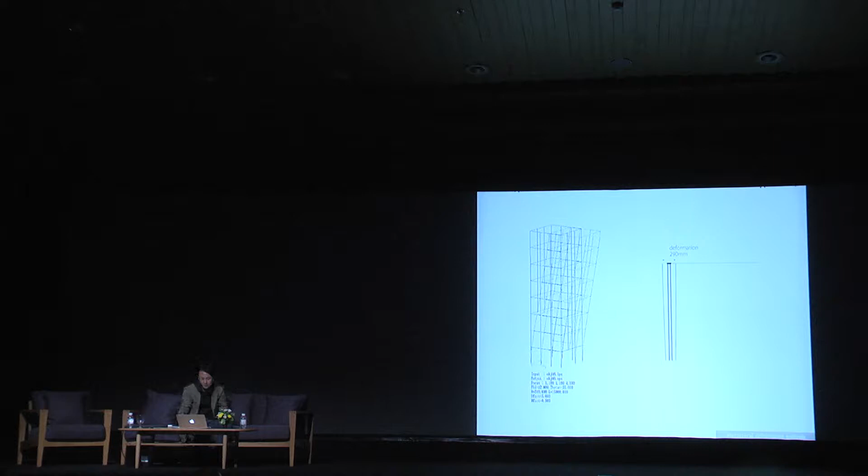They all have bracings in all grids, and they have loose holes. So usually they're movable, but when the wind gets strong, this locks at some point, and it avoids collapsing. The structure is sandwiched with a rubber sponge-like material to deform with the structure. It acts like a sail on a boat to take the load to the steel frame, and also absorbs the small sound and faint vibration during the deformation.

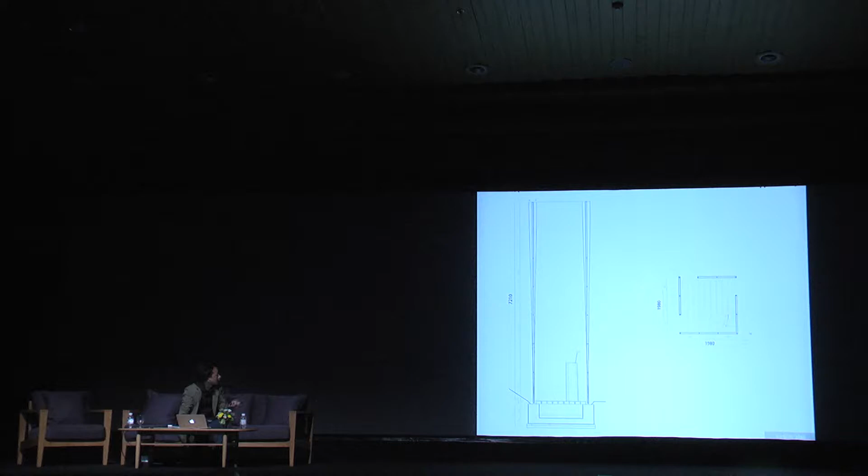So this is from the inside. We put a tall chair inside to see the deformation more, because as you go up, you see more deformation. So we made the chair a little bit long. You can see that the size is very small, 2 meters by 2 meters. So it was a structure to frame the whole scenery for us, with the windmills and the scenery.

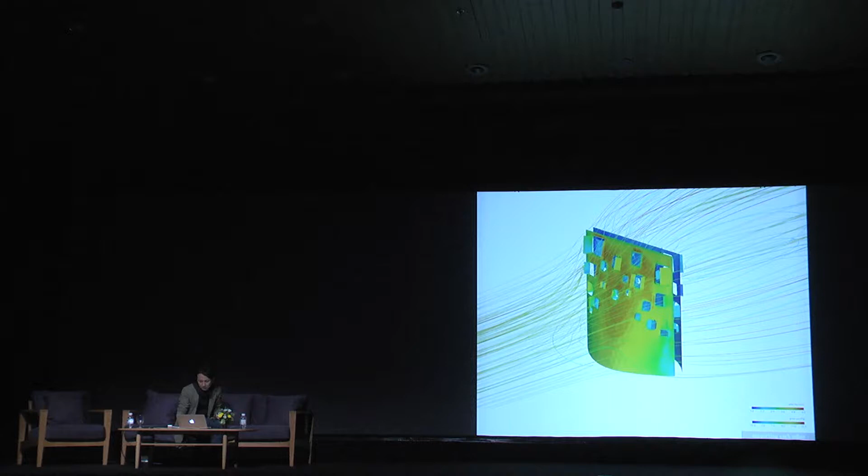And trees and plants grow, and maybe butterflies stop over. We imagined something like that in between these two walls. Sky, horizon, grass, small forest. We hope those things will be grown in between these spaces and mixed together with the surrounding environment.

And the shape of the wall is, the base is a parabolic curve, and as you go to the top, it gets straighter. So from one side, they can gently take the wind to the side. But on the other hand, the wall takes in the wind load, so it falls down. So these two walls are actually helping each other and supporting each other to exist in this place.

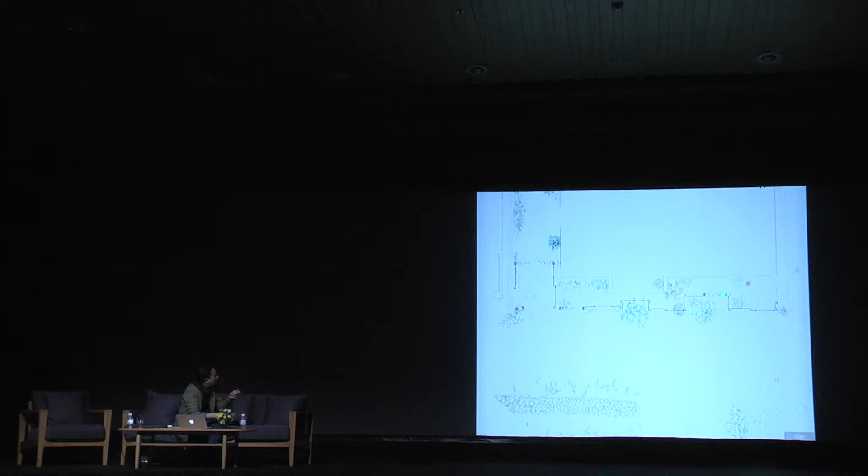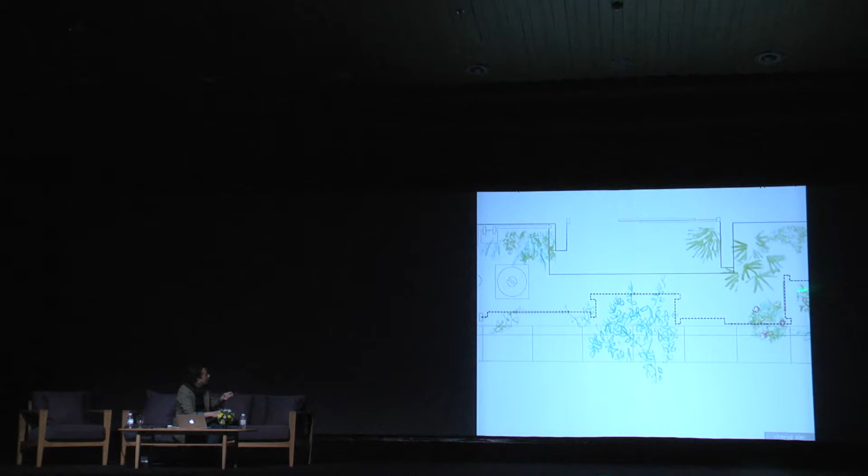But it's still weak. So we bent it at the corner to make a pillar-like structure, and an intermediate pillar-like structure to make the wall stronger. So this is what we made. And we put a stainless mesh curtain for the gates. And there's another gate here, actually, a bigger one.

And we opened some windows so the wind can go through. Also, this material can let the air flow through. But we wanted the wind to come in also, so we opened some openings.

So this boundary can be reread according to the situation of the surroundings and what comes up together with the sceneries, like continuous with the street or continuous with the living room, and it can be from the other side. The street can be wider. So it's something that's very flexible in a way, and it works like a lace curtain. So in the daytime, even if you open up the window fully, no one can see inside clearly.

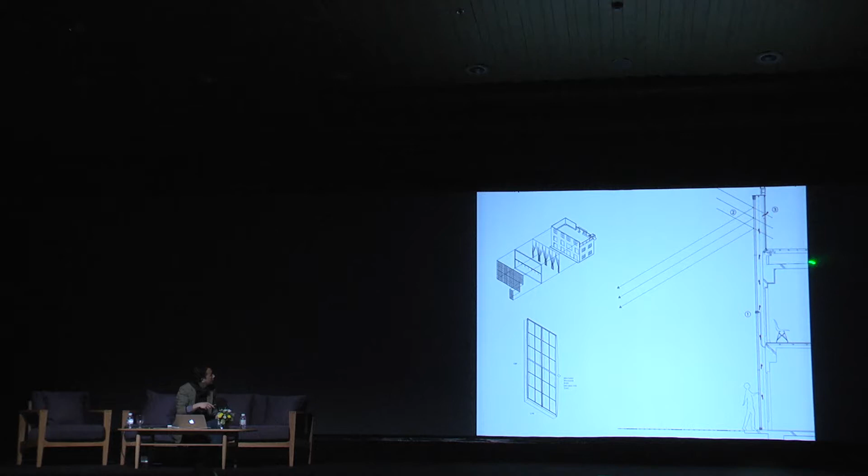So we needed the door to be light, and we calculated this balance, and we also calculated the deformation of this door during typhoon season. So we ended up with this door being able to deform 10 centimeters towards this side. You can bend like this for 10 centimeters without the glass or anything, or the doors getting off the rail, in the very windy situation.

So it's like a very, not very hard, maybe window. It's kind of like a membrane kind of structure window.

And this is the reflection we have. This garden is quite artificial because the shadow, we have it to the opposite way. This side is the south, the sun is here, so it's a very artificial garden.

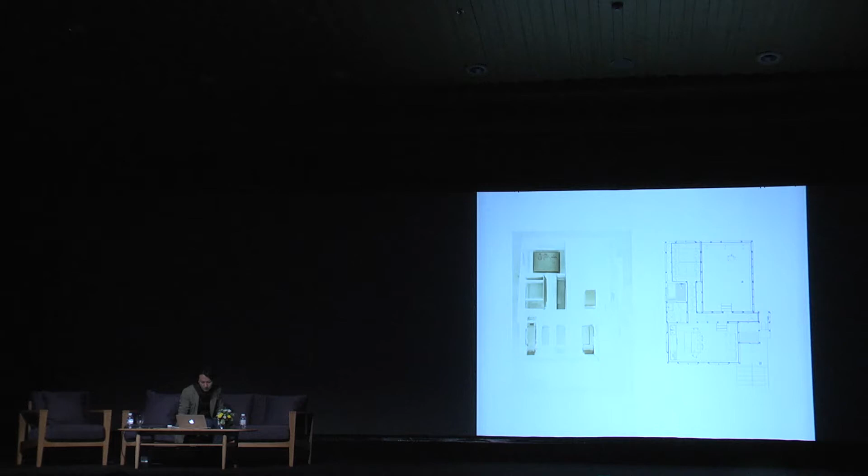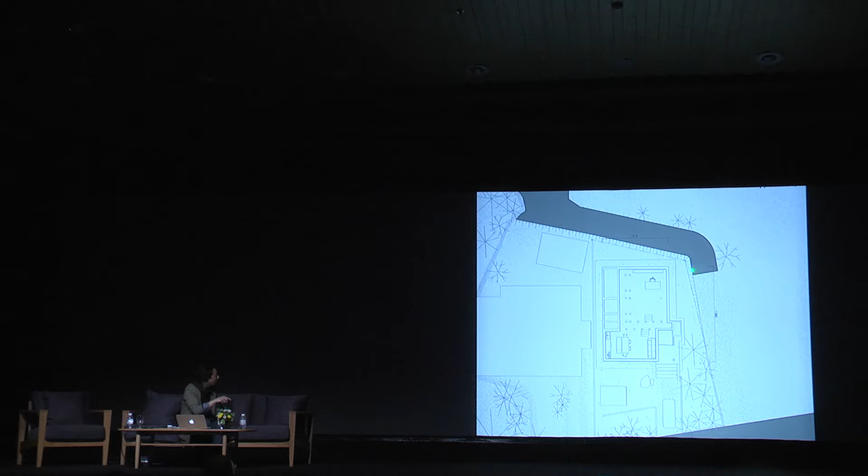And it was reasonable. We tried many plans, but he was trying to avoid taking off pillars and things. So it was very polite to the structure, and the variations we made were actually not polite. So we thought we'd give this plan to the renewed house, but instead we looked into the foundation, which was very dirty. If the upper house is clean, but you have a dirty foundation, I thought it was really a pity. So we thought we should refresh this, and also anti-earthquake. We had to strengthen the foundation, so we focused on the foundation instead of the upper house, and we added this concrete slab and lowered the initial height.

The owner actually knows what he wants, and we can be someone who can advise them, but it's sometimes hard to propose an idea, because I think that's not what they're looking for. Actually they're looking for something else. For this one, they were looking for an idea to live with the surroundings and have a lighter environment instead of the previous dark house. So we focused there.

So we just added this concrete slab bowl, insulated it, and put heating pipes inside. In winter it becomes a warm bowl, and in summer it keeps the cool air inside. Since the previous floor was changed lower down to almost ground level, the sunlight reaches deeper, and the scenery which looked horizontal before now looks up to the mountains, so you feel more sky from inside the house, closer to having a situation like outside.

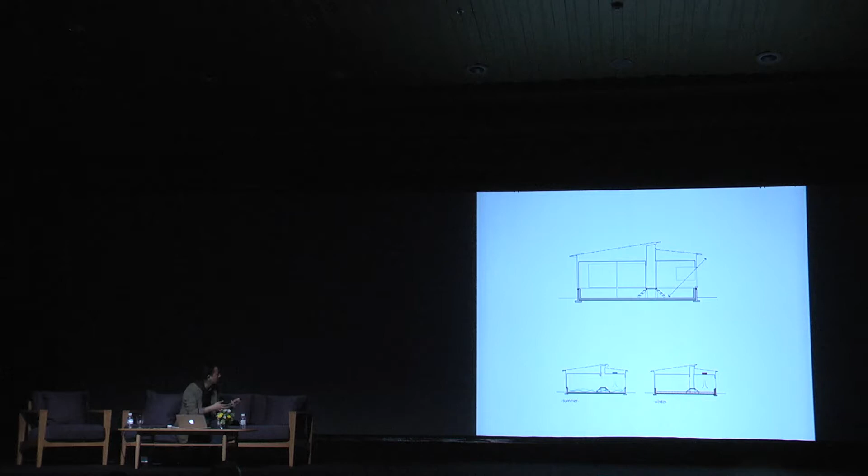And we separated the foundation and the housing with this long ringed baseboard, all around in one ring, to make the housing territory, which is put on top of the foundation.

And also reflection from the other side comes from down the corridor to lighten up the whole space. This is the existing entrance gate, but we left it as an entrance so you feel you're going inside the house.

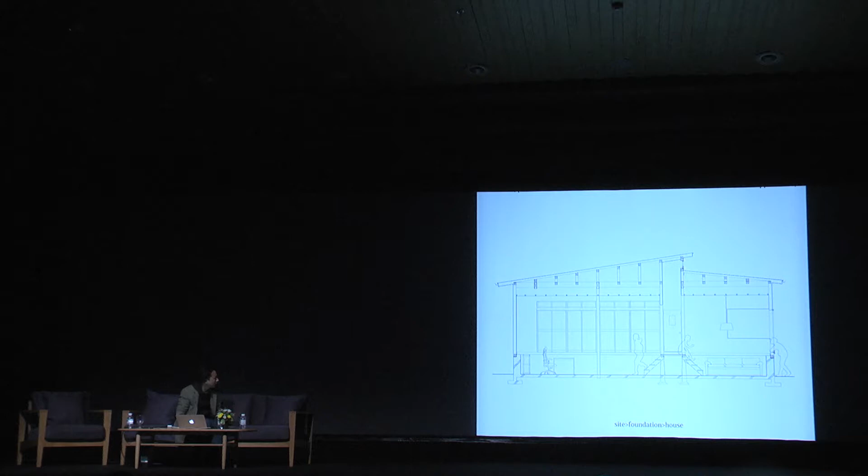These kind of little small elements are usually overlooked in making totality in architecture. But I think making these small elements, and designing very carefully these in-between relations, can actually cross borders even while making a very explicit boundary—not making transparent housing, which produces another problem. So we're very into those kind of overlooked elements.

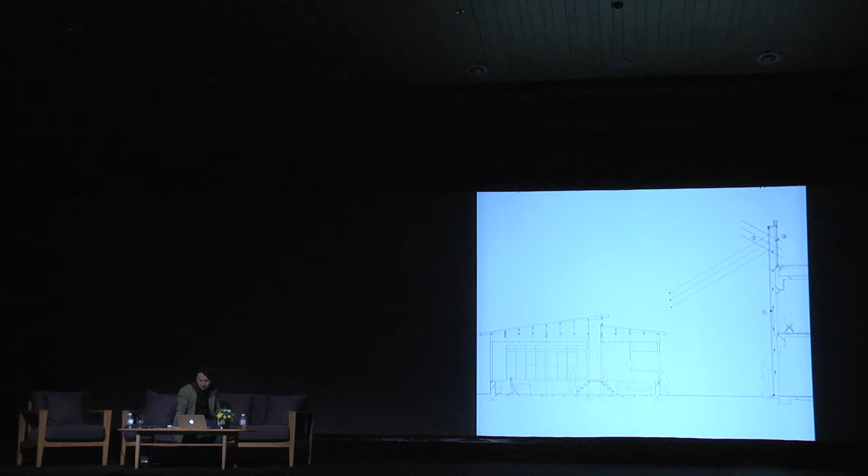And this one is called initiative roof—I don't know why we called it that. I think I wanted to propose something that was like there before the house. This is also a renovation project, and the main house was built 45 years ago. They wanted another room for storage, so they added a small room later on, maybe 10 years later, and it was to renovate this house. It's actually relatively big as a Japanese Tokyo house.

And we went to the site and saw the house, and it was very... it's from 45 years ago, the land is big, so the housing was also big. So it was actually big enough, and numbers were enough.

So we even actually had an extra room outside, but the client wanted something else. The client wanted to add some kind of green room or glass room to the garden, and to gather this separated land into one again. So I think that's what they imagined with this greenhouse.

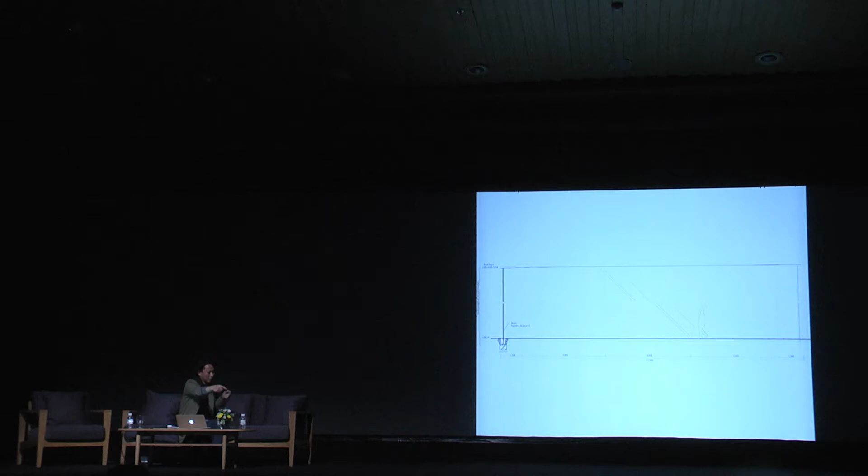So this is the scale, and the staircase brace also works as collapsing to this way, because it's a very umbrella shaped structure that doesn't define a place like surrounding with 4 pillars. It's just 1 pillar in the center that creates this side and like this side. And also this is just bent with its own load.

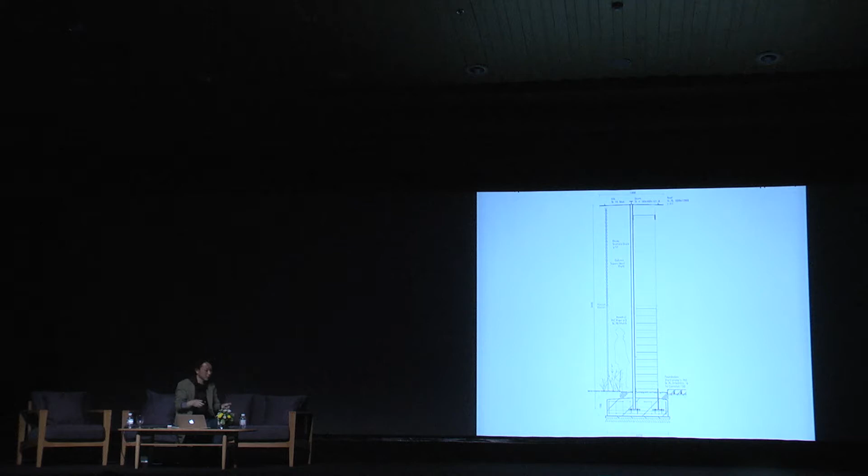This is a 4.5 millimeter steel plate, and it's like a very light, slightly bolted shape, also pulled at the end with this chain. So it's a very flexible, very complicated shape, this roof.

And it kind of grabs all the surroundings so it makes this garden and surroundings an element as an interior, like for the house, for the living. So you can see it's slightly sloped in this way, and also it's sloped this way.

In the previous projects, we were defining the scale in a more aggressive way. But this time, we tried to scale this thing not to avoid the existing elements. So these existing overhangs have a function that blocks sunlight in the summer, but gives sunlight deep into the house in the wintertime.

And so we didn't want to avoid that. We could maybe extend this overhang, but that would make the wintertime very shadowy. So that's why we separated the structure outside and made it higher, so that it actually creates extra shadow at the summertime, so that the inside house and the garden have connected shadow.

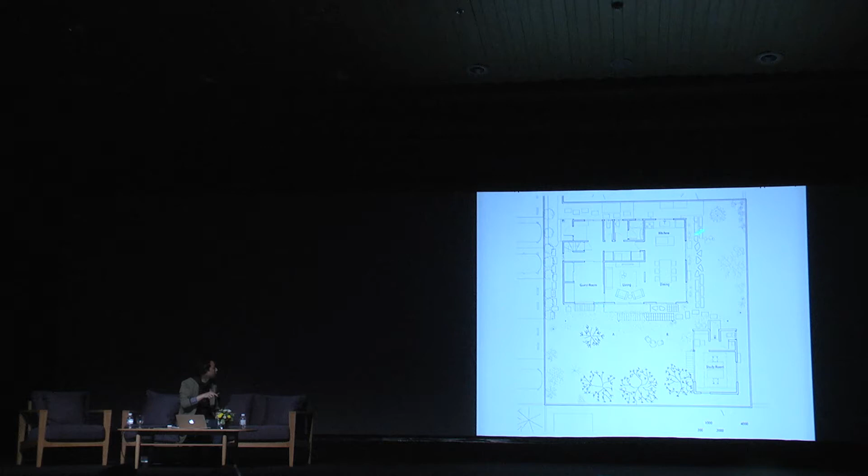And this client, they don't even know what architects do. I don't know why they came to our office, but the site is very close. I think that's the only reason. And the request was to make the living room big, and also it's a housewife, so she wants very efficient water spaces so that she can work very efficiently during daytime.

And also it's very dense. The housings are very densely built around. So she wanted privacy. She doesn't even want to make any window transparent. So that's what normal people say, and I can understand that really. So I wanted to propose something that can create that request more architecturally.

So we made this place. We proposed to use these utility spaces to be the depth of the living rooms and bedrooms, because they don't want to make many openings to this side. They just wanted slight light from the south side, just lights.

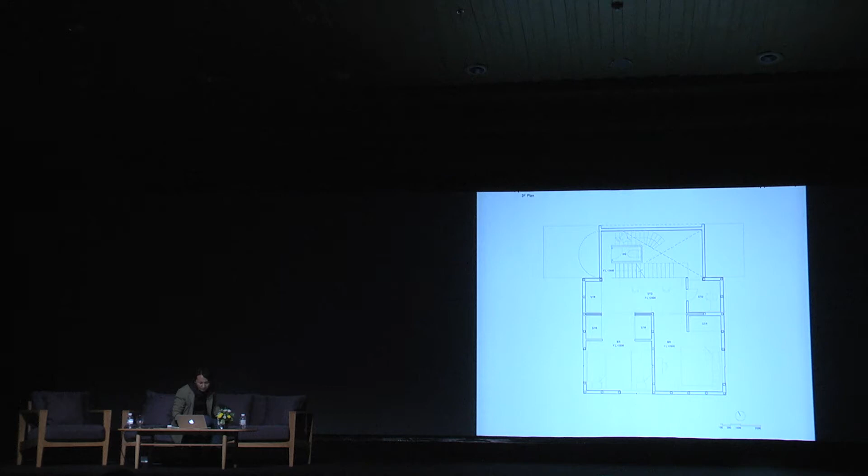So we tried to make this place, which is usually like a black box in the house, but it's actually 1/3 of the space in the house. So we thought we should open that in some way and use that as a scene for the living room, to make it deeper and maximize the feeling of the living room relative to the site size. And that's why we separated them, so this is the utility space, and this is the room.

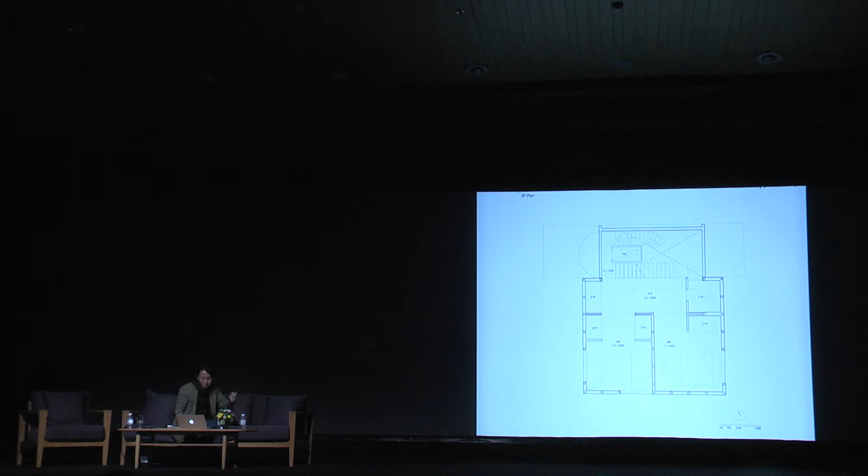And also the budget is like a normal house, so we had to deal with the budget also. So we decided to make the rooms relatively cheap, using industrial material, very much like a housing maker house, and we focused and put money into the utility spaces so that this room can have a good scene.

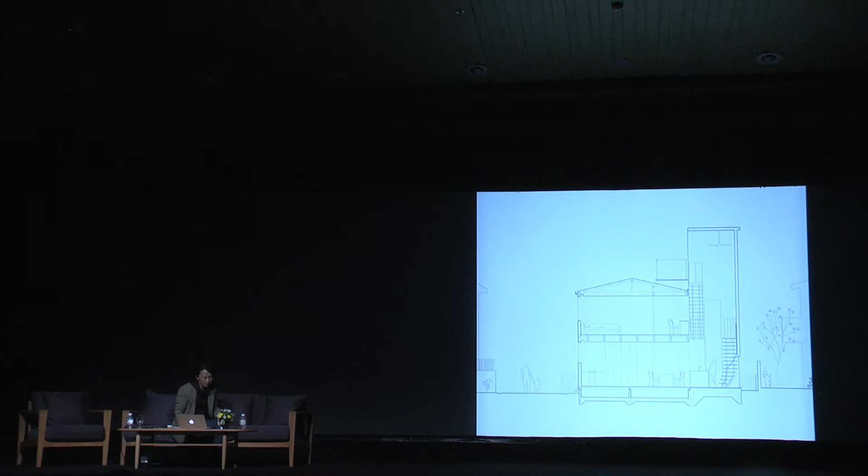So this is still an ongoing project, so we're not really sure of what we're doing yet, but the concept is like that. We're very interested in really ordinary living, and we want to propose architectural ideas to ordinary living.

So this is the second floor. And this goes up to the rooftop of the rooms, and it's a terrace. But you have this huge volume still, but it's cropped by the house in front. So you just have a small hut, like stuck at the back. So it's very natural with the scenery from the street side.